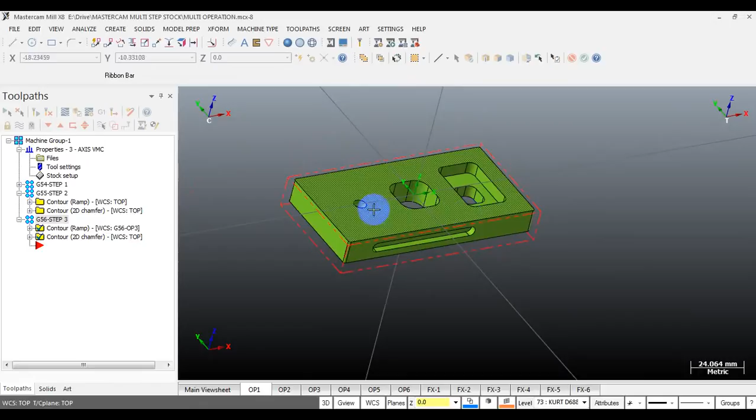Okay, at first let's take a look at our part. Here I got a very simple part, and this part needs three setups to finish. You can see here in the first step we machine this face, and in the second step do a facing to cut to the desired thickness and do some chamfering here. And in the third step or third setup, we need to cut a slot here and do the chamfer. So this is our part.

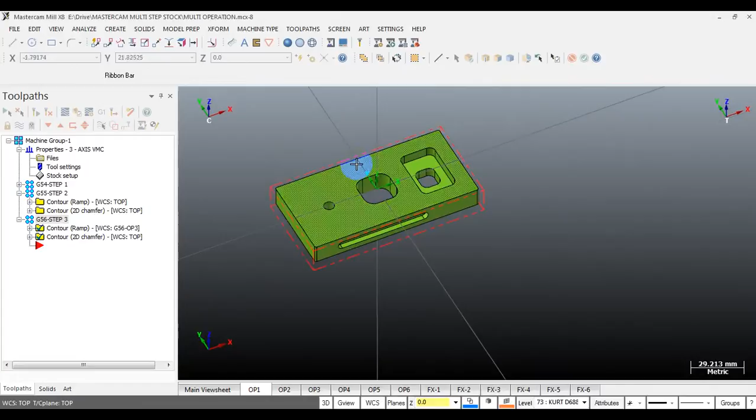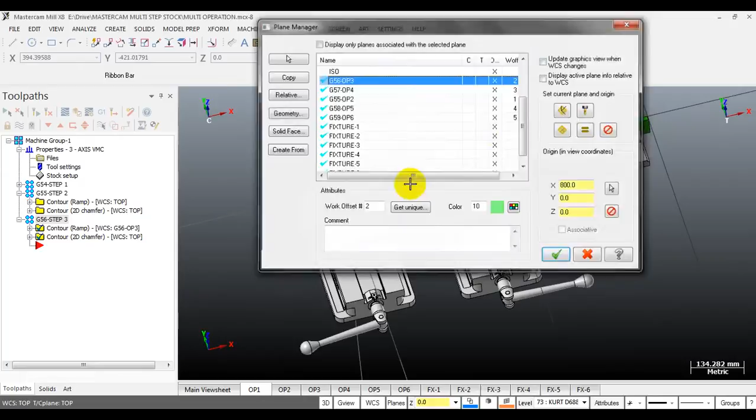And I will show you the setup. Okay, I have made three coordinate systems. You can see here. You can see this is our, sorry, coordinate system. Let's see. I got three vices. This vice for step one, this is for step two, and this vice is for step three. This is just for information only.

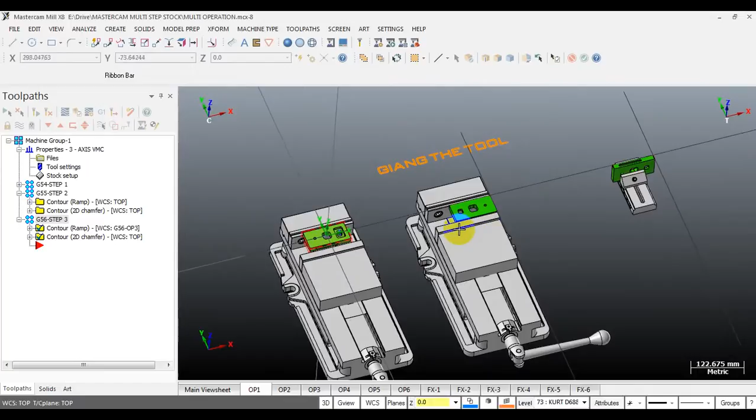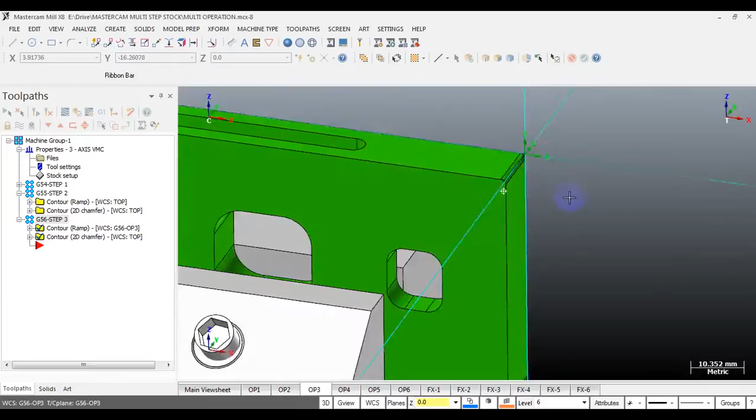You can see I have one, two, and three. I have created three coordinate systems for every step, and I got here one, two, and three toolpaths for step one, step two, and step three. To save your time, I have created them before.

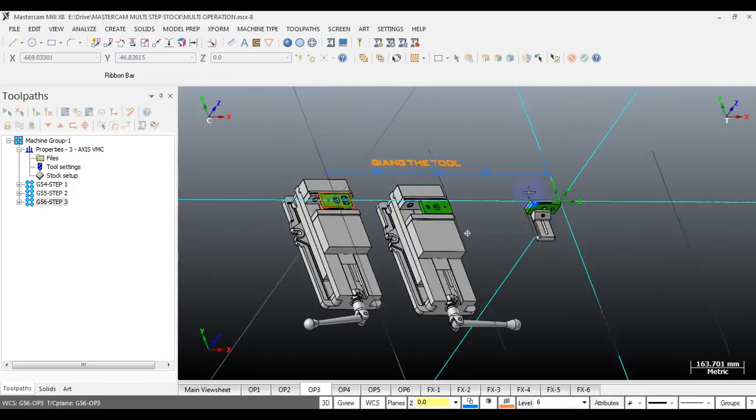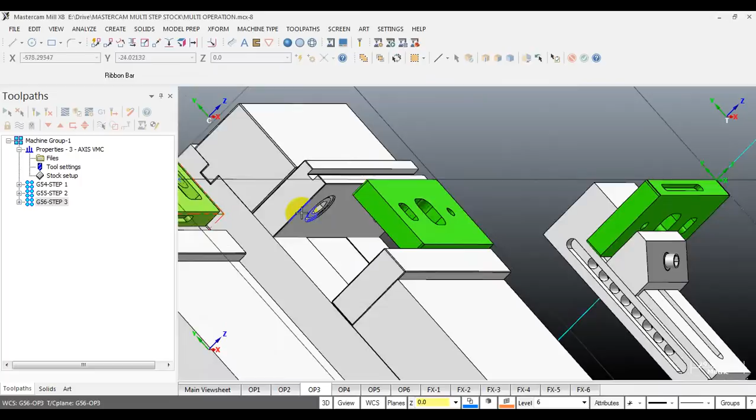So this is our part in step one, and this part is step two. We need to clamp and do the facing here, facing this surface. And in step three, we clamp like this and mill this slot. Okay.

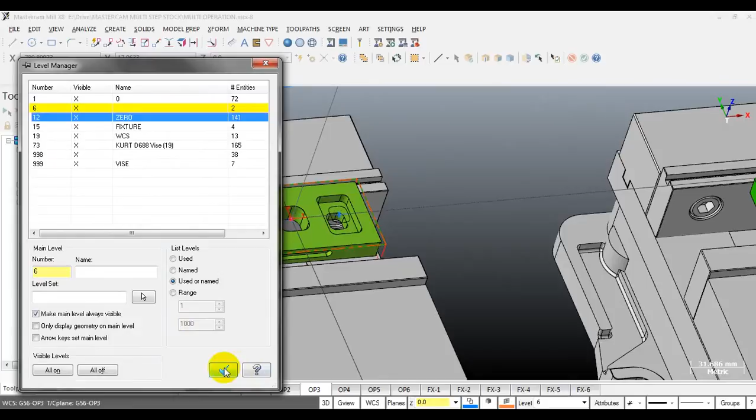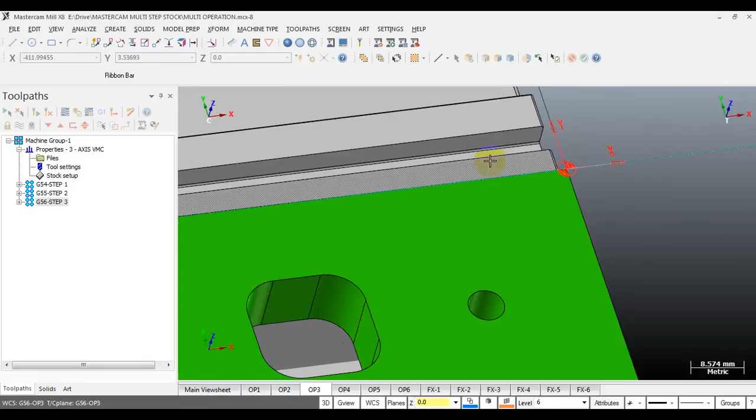I will turn on the layer so you can see in this red area is the coordinate system, the first coordinate system. And here on the edge is the coordinate origin of step two, and here I got the origin of step 3.

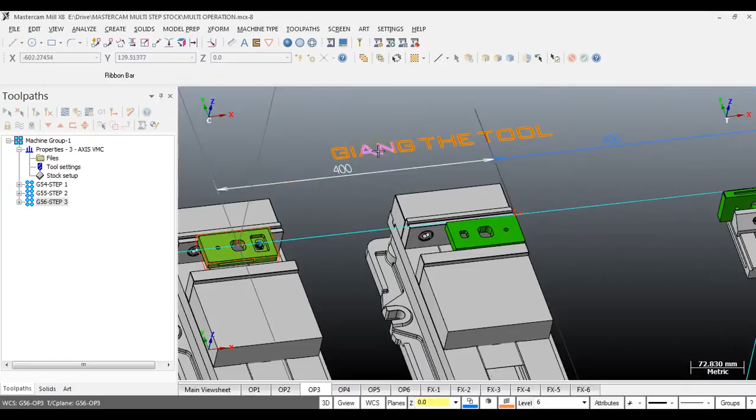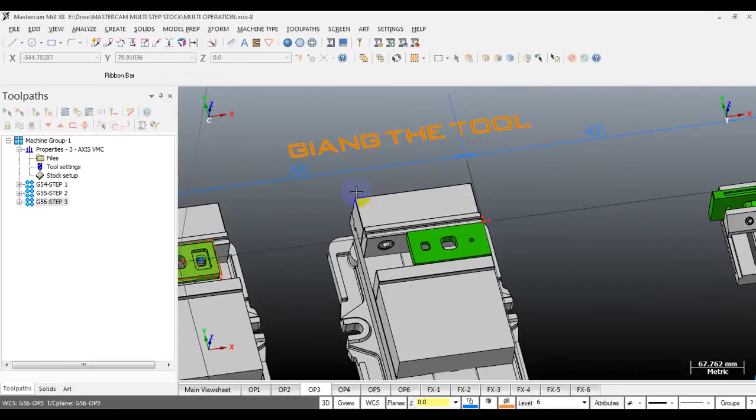And one thing very important, in Mastercam you have to know the distance between this origin to this origin, and from this origin to this origin. And in this case I made this 400 millimeter. You can see here the distance is 400 millimeter. Yes, that is very important. If you don't know the distance, it will be very difficult or impossible. All right.

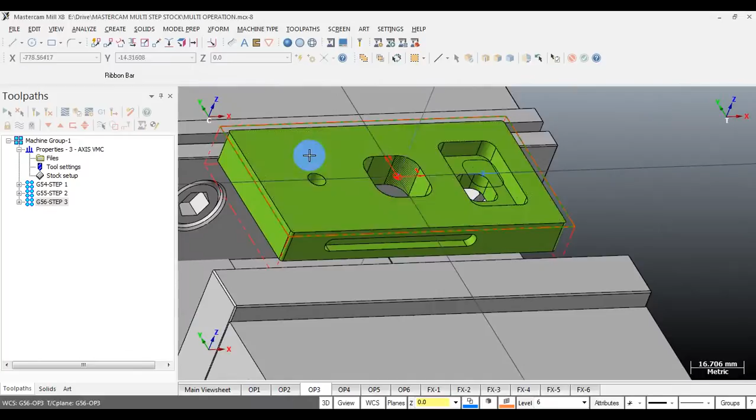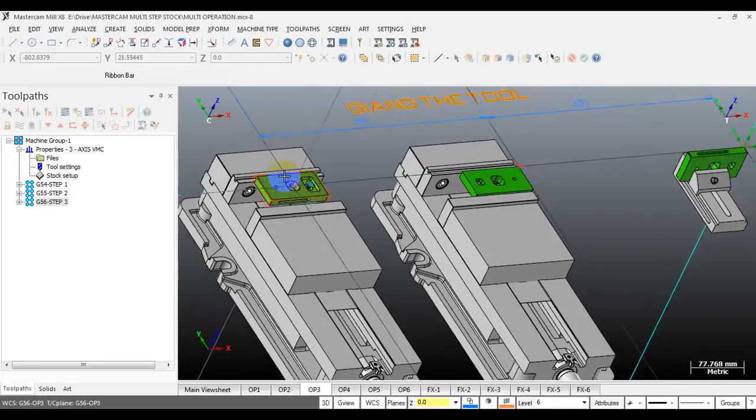Why do we need to verify stock like this? Because if you machine using only one solid, and you create coordinate systems on this solid, you cannot verify the fixture, and it's very difficult to know if there's a collision. So this is a very good way to control the process.

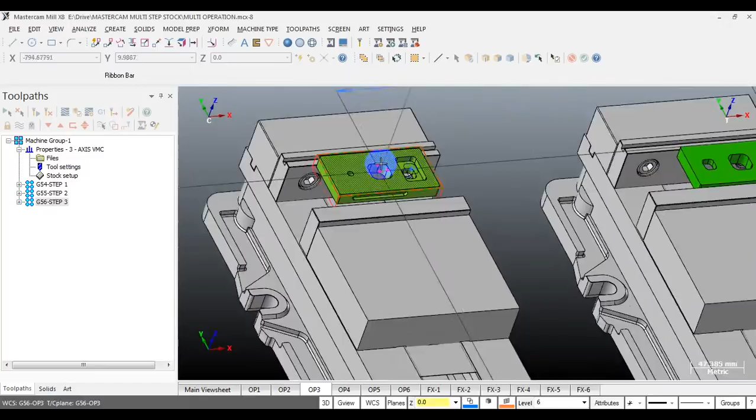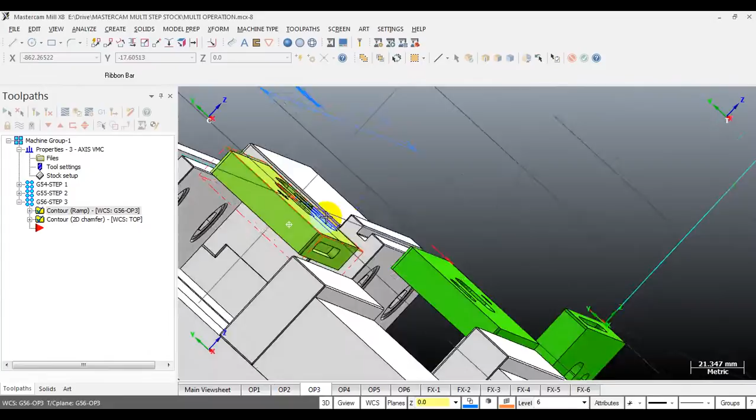Okay, you can see here again, step 1 for this vice, step 2 for this vice, and step 3 for this vice. Okay, we begin with step 1. I do a stock setup here, already got the dimension, and in this case I use 16 millimeter thickness stock. You can see here the initial stock, and I have created the toolpath already, so we can verify the first step here.

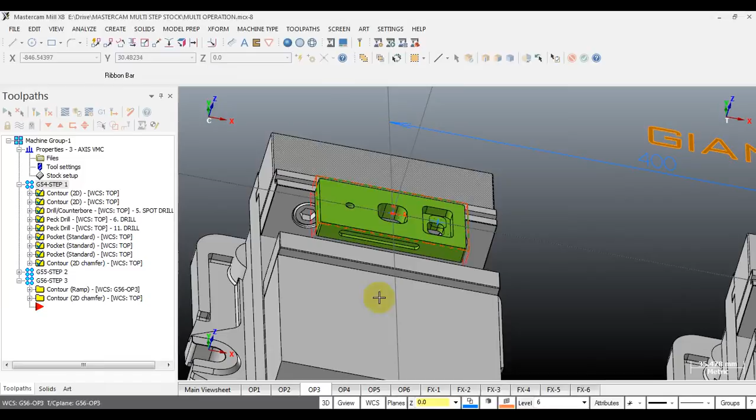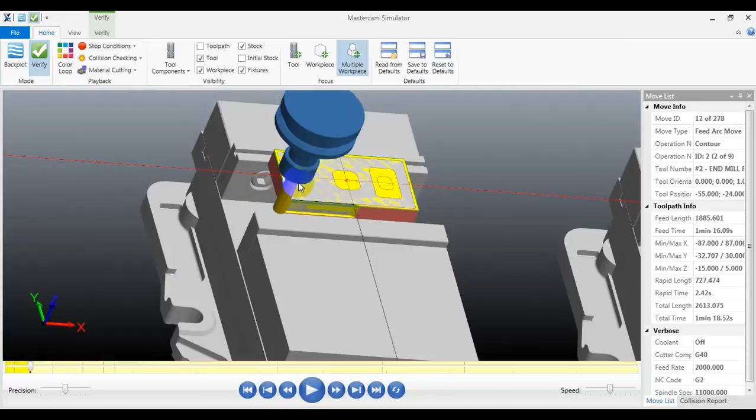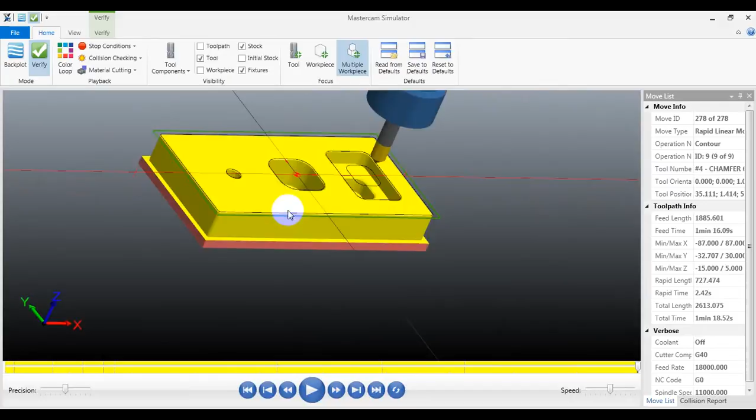Okay, let's begin with verifying the first step. Sorry, my computer is quite slow. Yeah, you can see here we have 3 vices. At first we verify the first step. Let's do a quick view so you can see that. So I will do a fast forward. Okay, and this is our first step. Let's turn on the workpiece so you can see it clearly. And this is the part after the first step. You can see that.

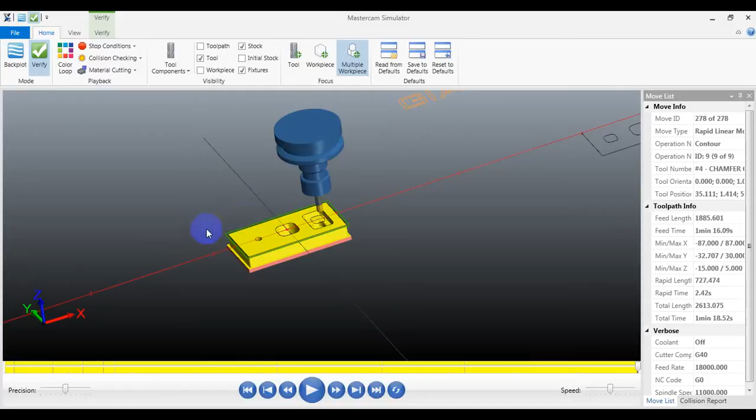Okay, and the important thing is we have to save this stock, and then we use the saved stock in step 2. Okay, let's save the stock. You click on File, Save Stock As, and select the location. Okay, you can name it, because this stock is used for step 2, I name it step 2 stock. And click save. You can see that the stock will be saved as STL files. Click save. Okay.

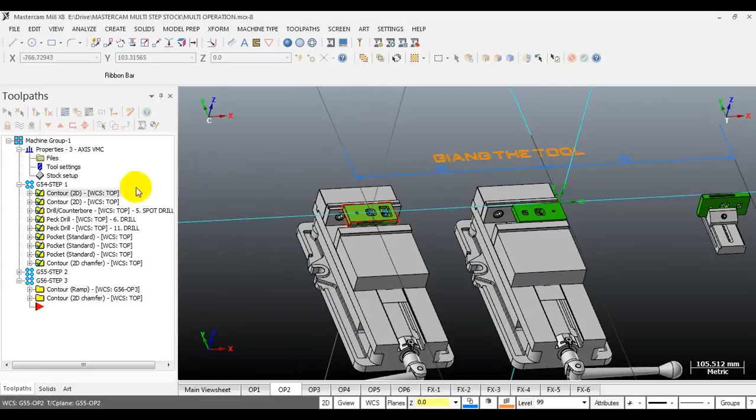After you have saved the stock for step 2, the next step we need to do is import that stock into our environment. To do that, you select File, Merge Pattern, and select the STL file you have saved. So you can see this is our STL file.

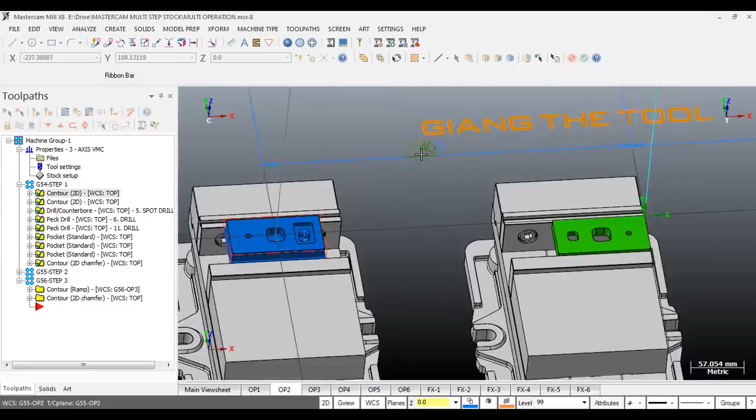So this is the location in step 1, and we need to move it to the right location, the right position in step 2. Because the stock is in STL format, you cannot do much with it. Just calculate the distance and move and rotate to the right location. So before you move, as I told you before, you need to know the distance between our two coordinate systems. In this case, it's 400 millimeter. Okay, it will help you when you move.

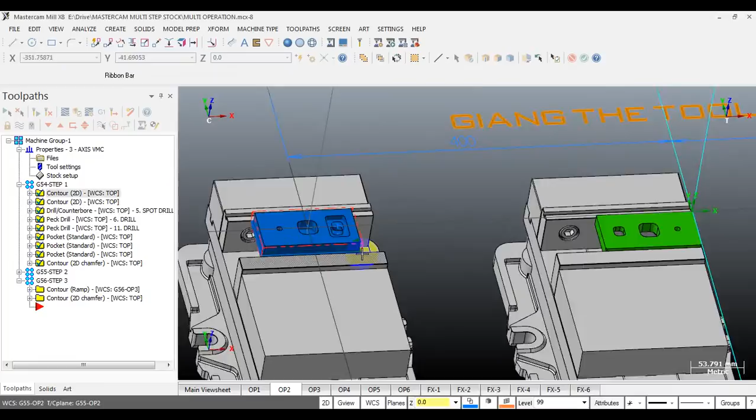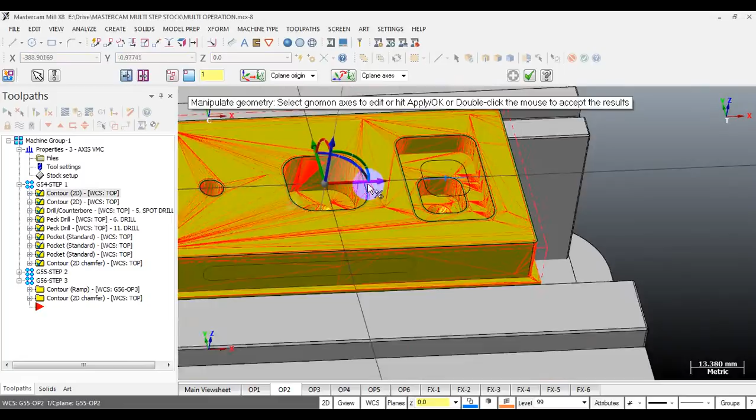So we select the STL file, and I move it in by using Dynamic Xform. So you can select a reference point, this here, the origin of step 1. I usually do this. And the first step, you need to flip it. That means you have to rotate it 180 degrees.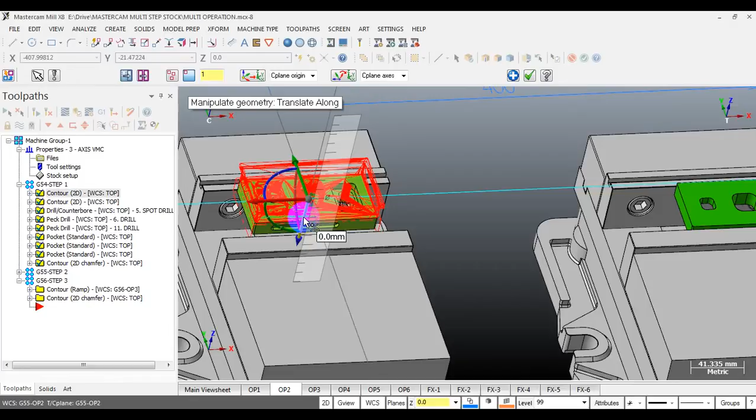Okay. After you flip it, you move it in the Z direction about equal to the thickness of the part, because in step 2 the origin is set on the face. So this part is 12 millimeter thickness, so I move 12, and okay.

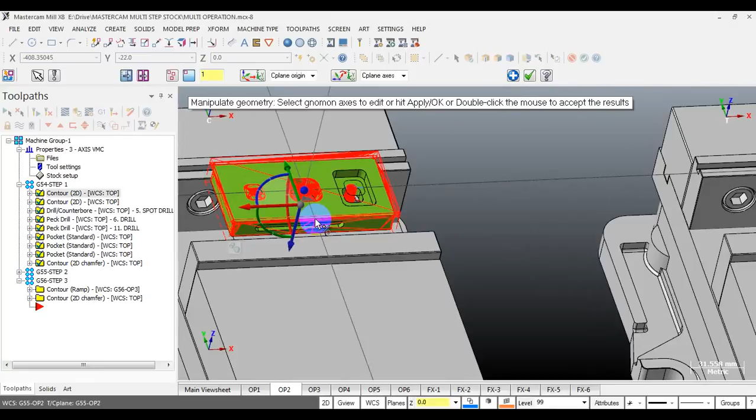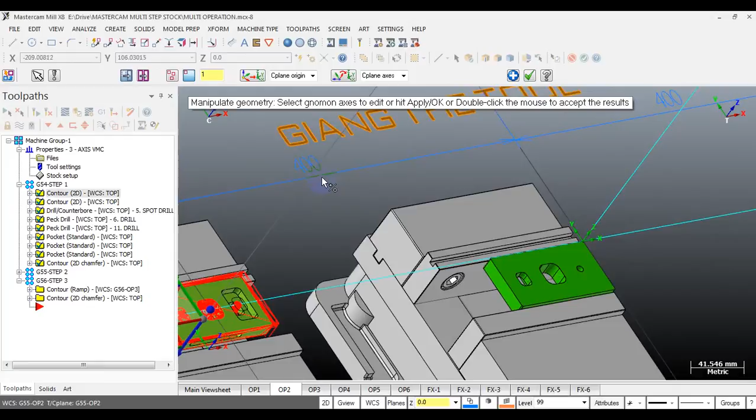Next we need to move it in the X and Y direction. For the X we need to move a distance equal to the distance between the two operations here. That's 400 millimeter. And because in this step the origin is set at the center, and in step 2 the origin moves to the edge of the part, we need to subtract the distance between the center and the edge.

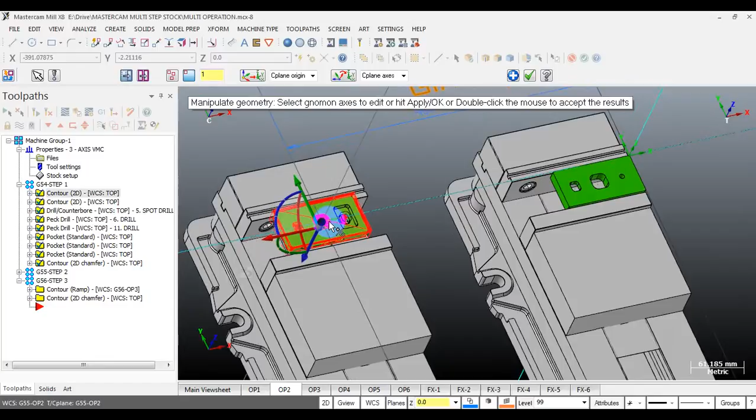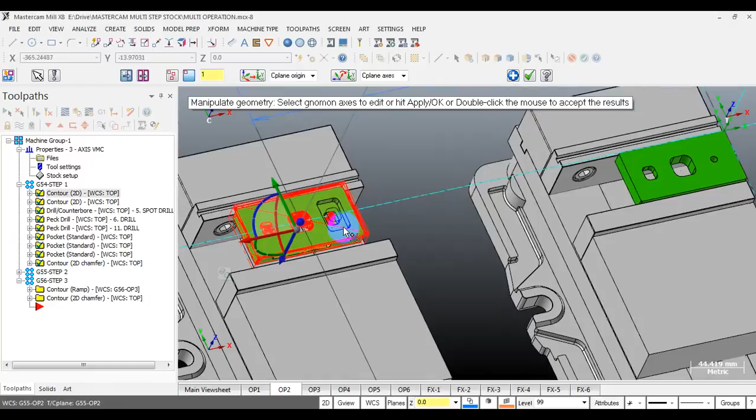So the total distance we have to move is equal to 400 subtract 50. Why 50? Because my part is 100 millimeter long, so I move it 350 millimeter. That's the right value. Sorry, I moved it in the wrong direction. You have to input minus 350.

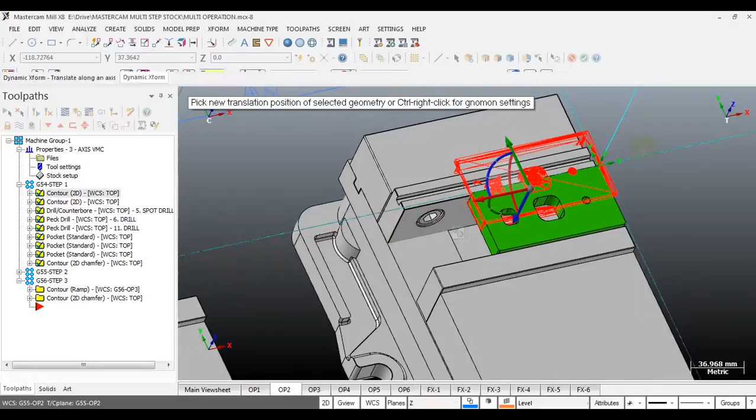Okay, our part is in the right position in X direction, and the final direction is the Y direction. In the same manner we have to move a distance equal to the distance between the part center and the edge of the part. My part is 50 millimeter wide, so I have to move a distance of 25 millimeter. Sorry, minus 25 for the right direction.

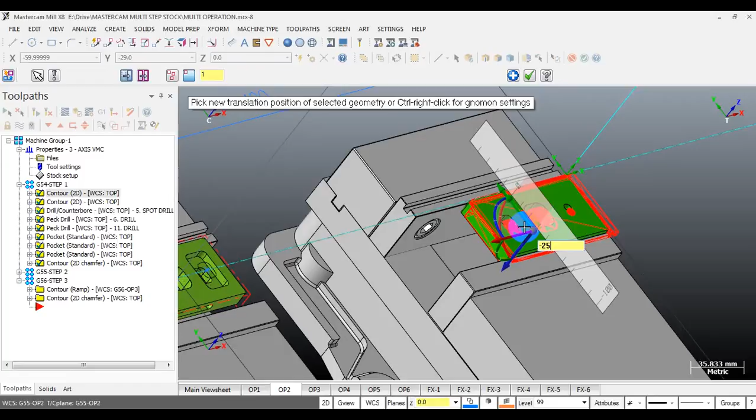Okay, done. And so you can see the stock is now in the right position. In step 2, that's what we need to do: move the stock to the right position. That's very important. You have to calculate the value before you move.

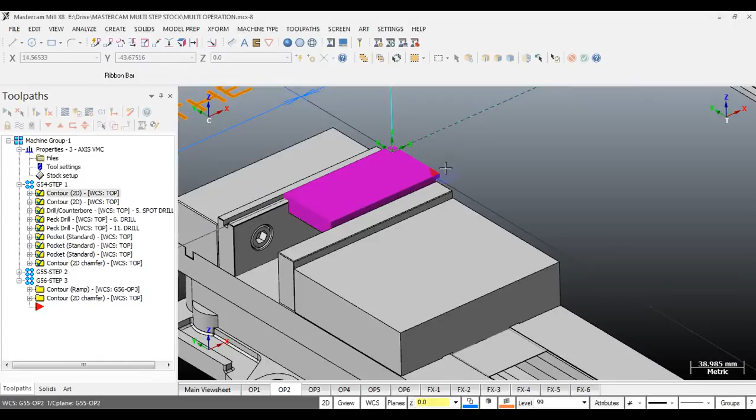Okay, the next step, very important. You have to save this stock in the right position into another STL file, and we use that file to verify step 2. Before you save this STL file, you have to turn all the layers off. Just keep this stock. Why?

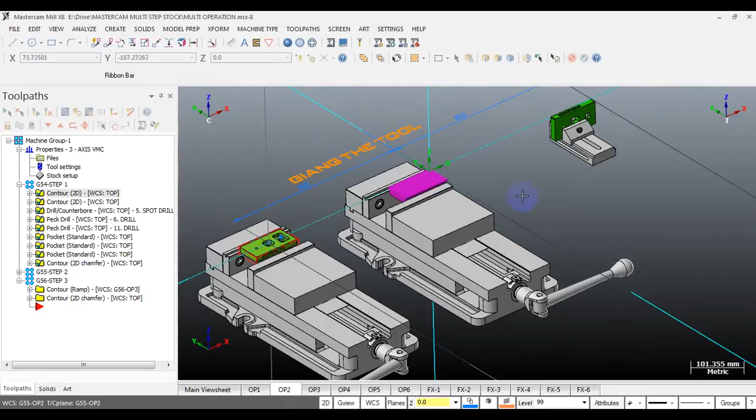Because if you don't turn all the layers off, such as this device, when you save, all of the solids here will be saved to the STL file, and we don't need it. It's not good. So first I moved it to another layer, another level. Okay, it is level 99. Okay, only one entity, that's the stock.

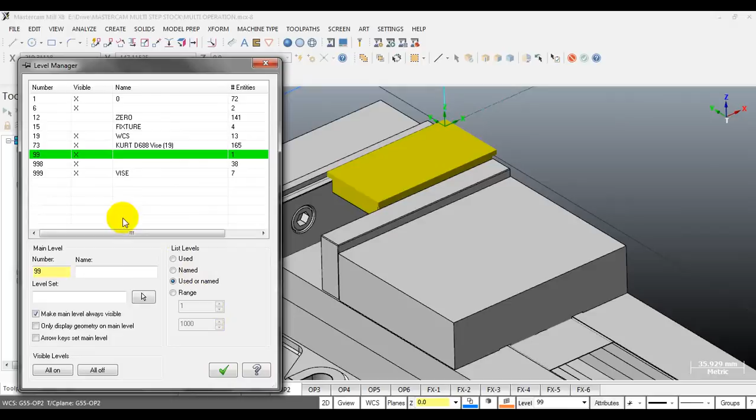You can move it to another layer, another level, and you turn all the layers off. Just keep the stock. I repeat, we need to keep the stock only. So now we can save it. Save it. You can save it in another STL file.

You can overwrite the old file you saved before, but it's better you save it in another name, such as step 2 stock right position. I think you should keep the original file because if we have to make some change, you can use this file to make changes, and you save this stock in the right position in another name, and this is what we use to verify in step 2.

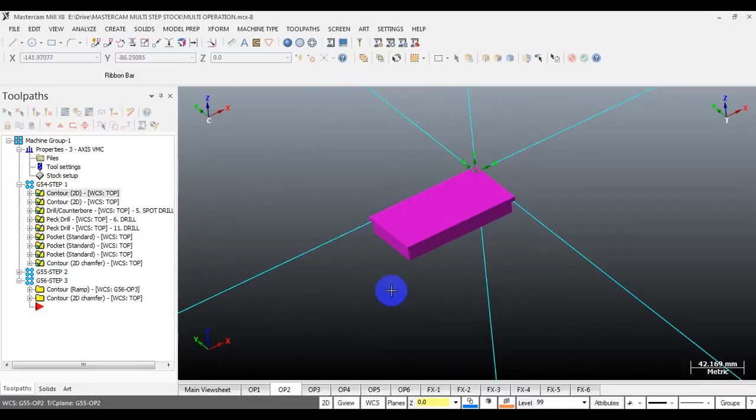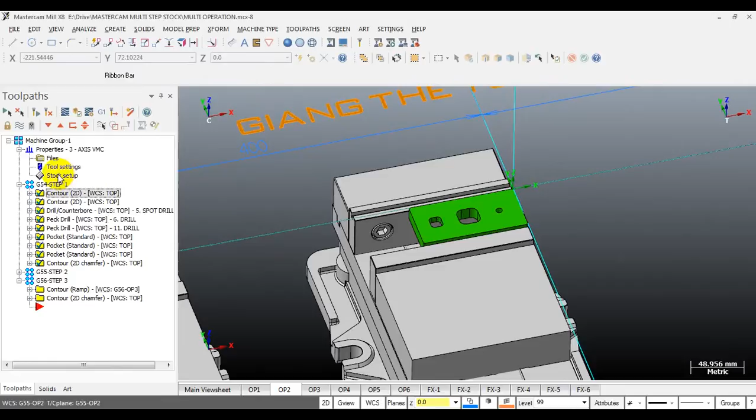Okay, it's done. The stock has been saved, and we can delete this now and turn the layers on. Okay, after we save it, we have to select that file for our simulation. Now move to step 2.

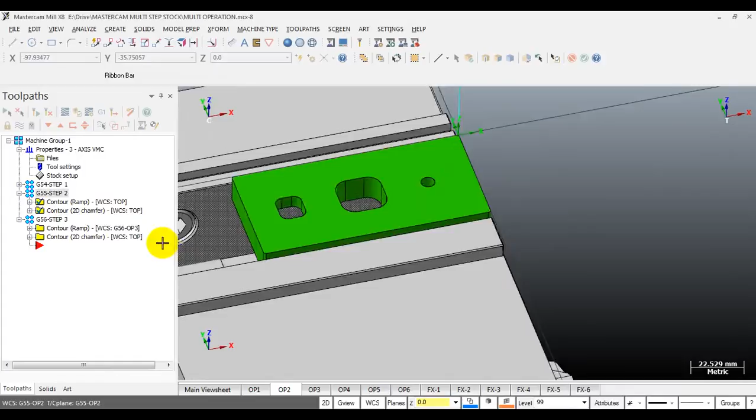In step 2 we have to do facing to cut the remaining material and do some chamfer here, very simple. You move to step 2 and again move to stock setup. Now we need to select file, since in Mastercam we use the STL file for stock setup. You can browse file here and select. Remember, you have to select your stock when it has moved to the right location. If you don't select it, this file will not work.

Okay, you can select the step 2 stock right position file. You can select display to preview it. Remember, the stock plane you need to keep as top because you have moved the stock from step 1 to step 2. In this case top is the plane I use for step 1, so you should keep this value, not change it to any other plane, just keep it.

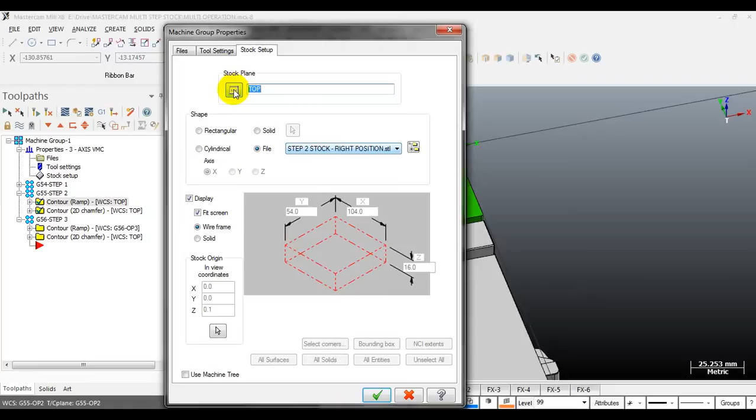So click OK, and you can see that this is our stock in step 2. That's what I want to talk about. Now we have the stock in the right location, so we can verify it.

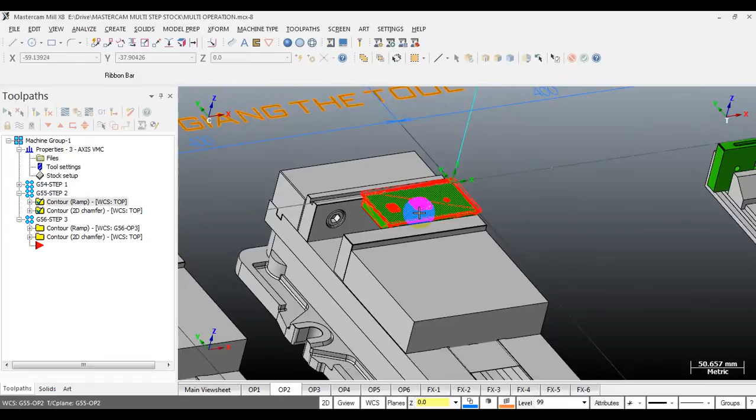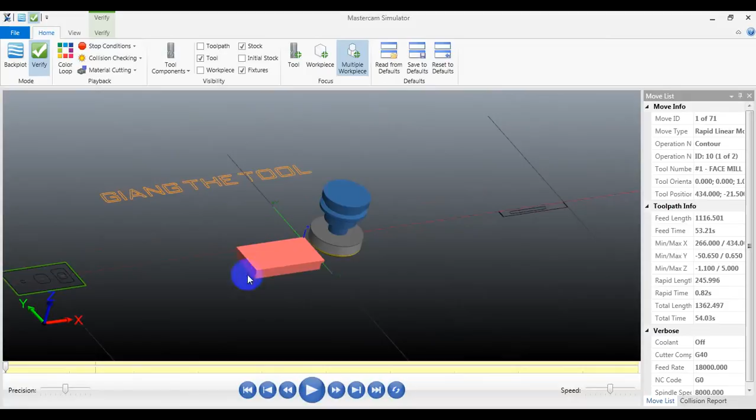Next we can verify step 2 with the right stock. Okay, select step 2 and verify it. So you can see here we got the stock, the right stock, and the fixture. That's what we need to talk about. That's what we want, right?

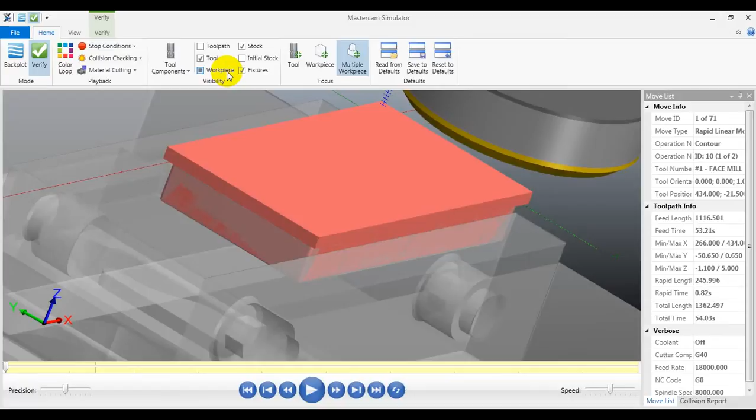You can select the workpiece and display stock only, and just do the verify. Okay, there is the facing. After the facing, we have this part you can see, and the chamfer. Very simple. Okay, so step 2 is done. We got the stock, the right stock has been verified, so we can control all of the cut.

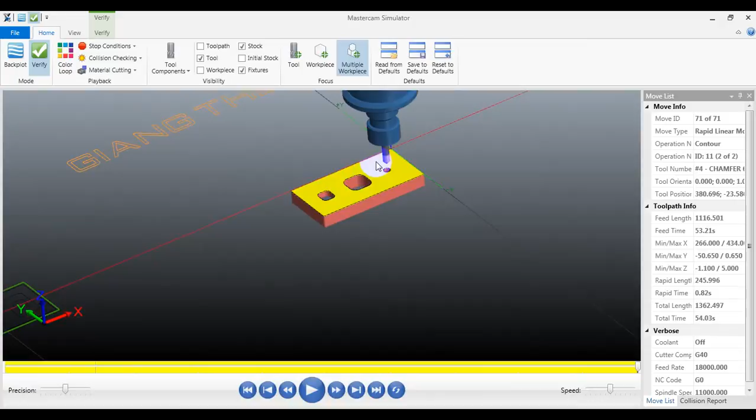Okay, and we do the same as step 1. We save this stock to use in step 3. I will do it quick, so to save your time, another save stock, and rename this step 3 stock. Okay,

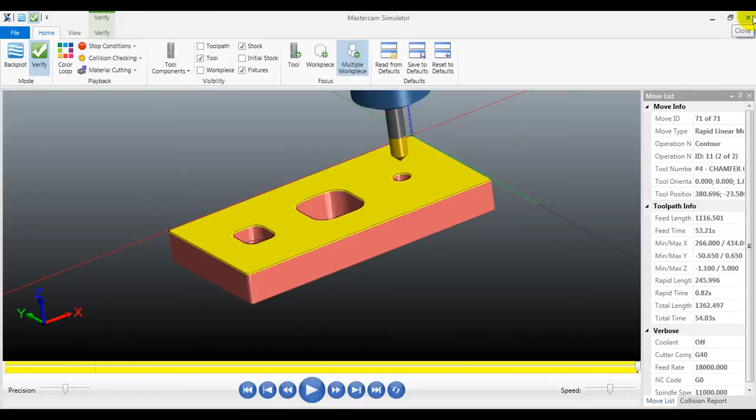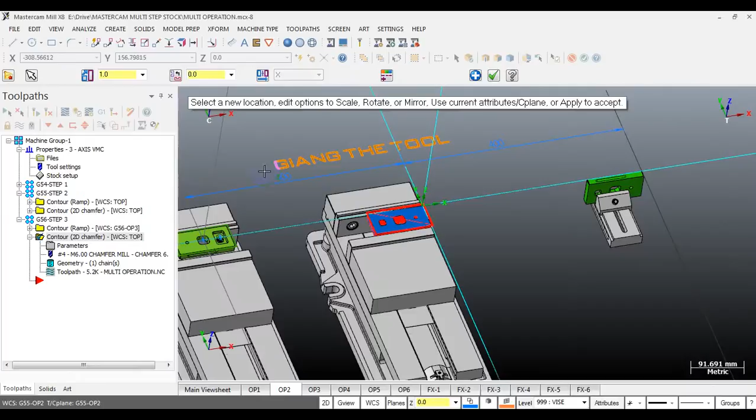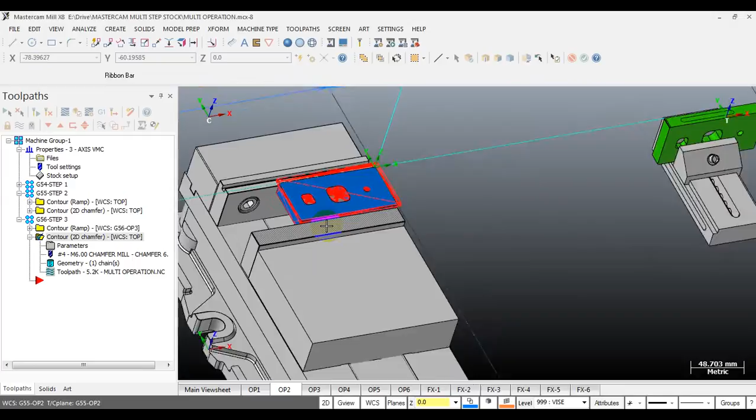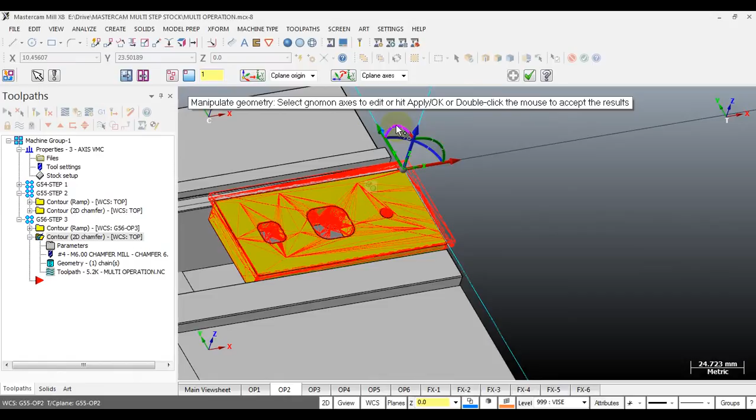I have turned some layers off for easy work. Okay, now I can move it to the right location. Select the stock, dynamic, Xform, select the origin for reference point. First, I rotate it by an angle of 90 degrees, and then I rotate it 180.

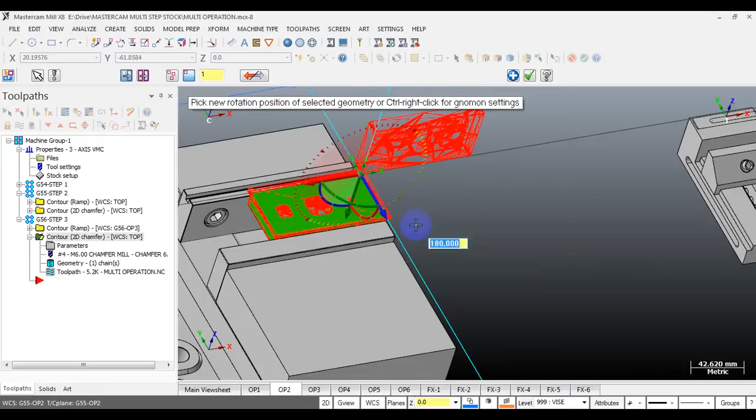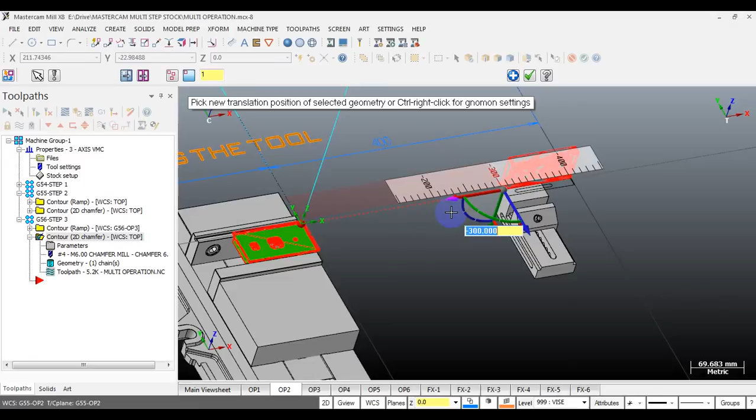As I know this distance is equal to 400, so I can calculate the right value of distance I need to move. So I need to move here because our part length is 100 millimeter, so I move minus 300. Okay, now the x direction is right. I have to move in z direction because the width of the part is 50, so I move 50.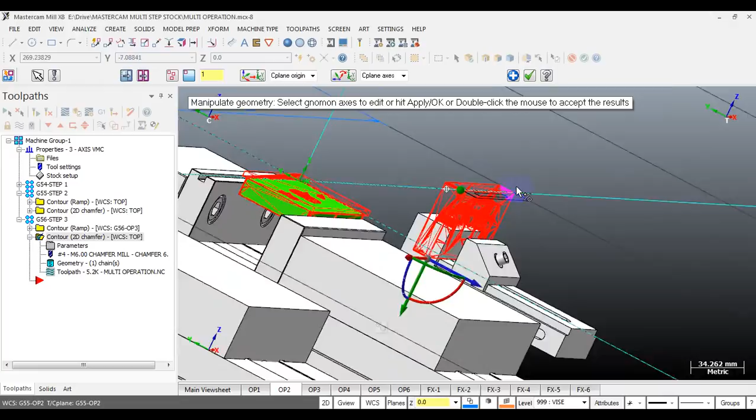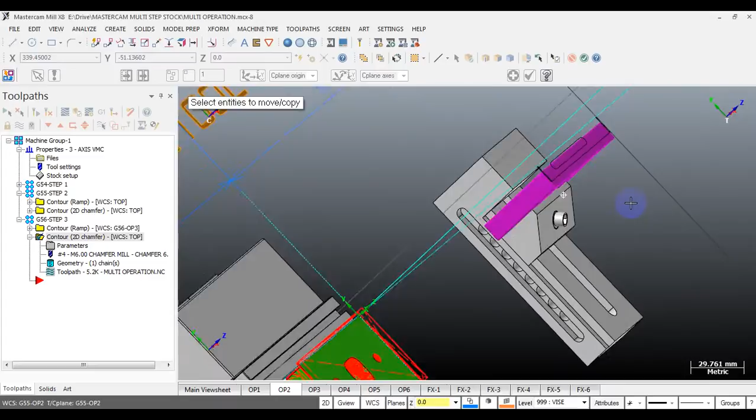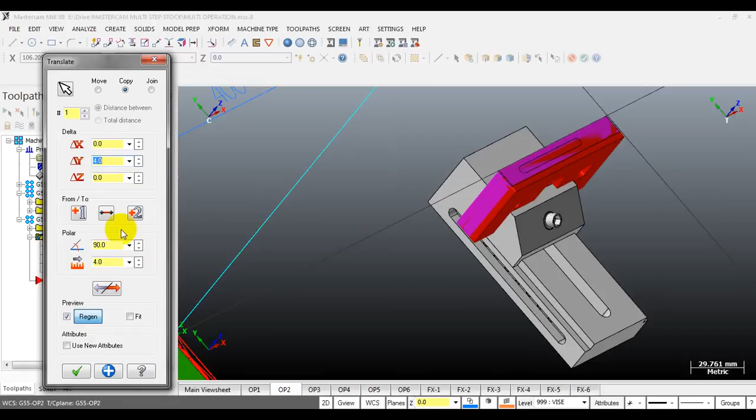That seems right? Okay, the last direction is the y because the part thickness is 16 millimeter, so I move 16. Okay, I'm sorry, the thickness is 12, not 16, so I move back 4 millimeter. Okay, sorry, I move it 4. Move. Okay, the part is now in the right position.

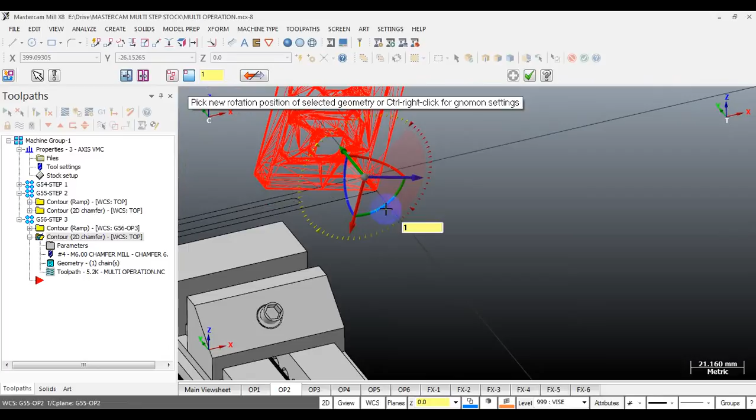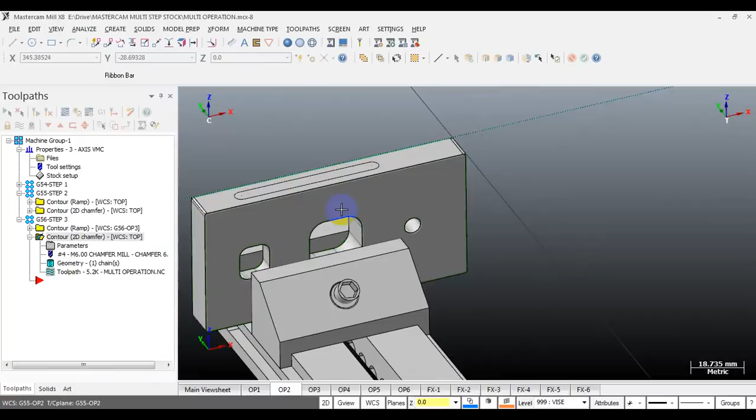Let's check it by displaying the part. Oh, I'm sorry, this is not in the right location. We have to rotate it 180 to turn the part over, and this toe needs to be on this side. So again, I move it. Let's do it quick. Okay, I'm sorry. 180. Okay, 80. And this direction, yeah, 100. Okay, let's check it now. That's right now. Okay, I'm sorry.

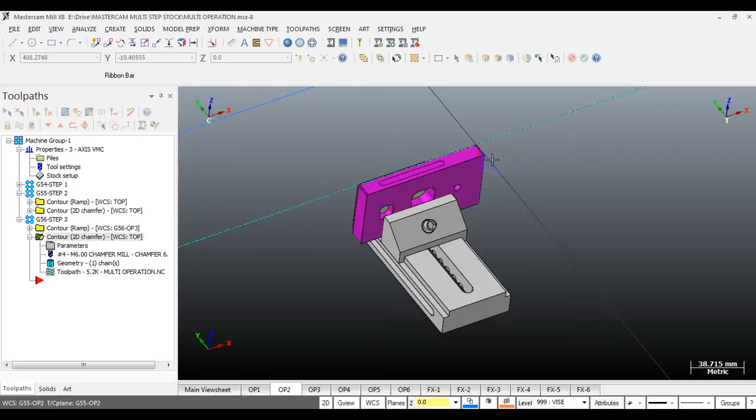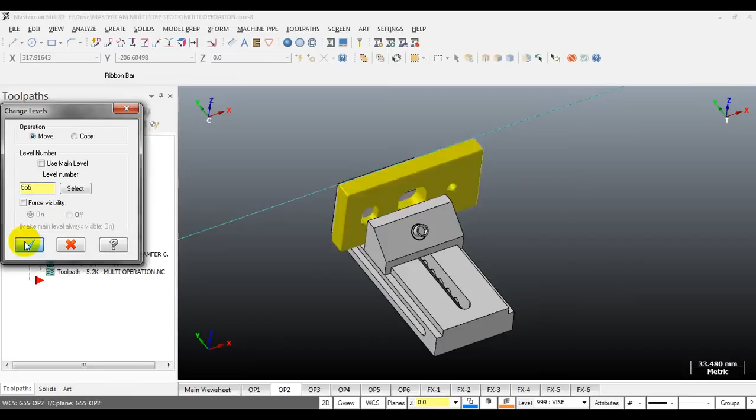So we got the stock in the right position, and we need to save that stock in order to use it. Before you save, remember to turn the levels off. We just keep the stock only, so you can turn the levels off and you keep the stock. Sorry, first I need to put this stock into a unique level. Select it and change to level 555 for example. So now I can keep.

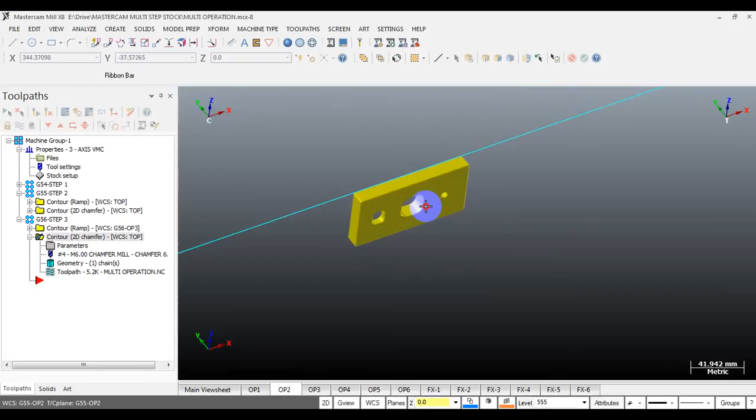Okay, I keep this stock only, and now we save this stock to use. Save it, select STL format, Parasolid, stereo. Okay, stereolithography, and select another name. Step 3 stock right position. Okay, let's go. After we save it, we can delete it and turn on the layers. Okay.

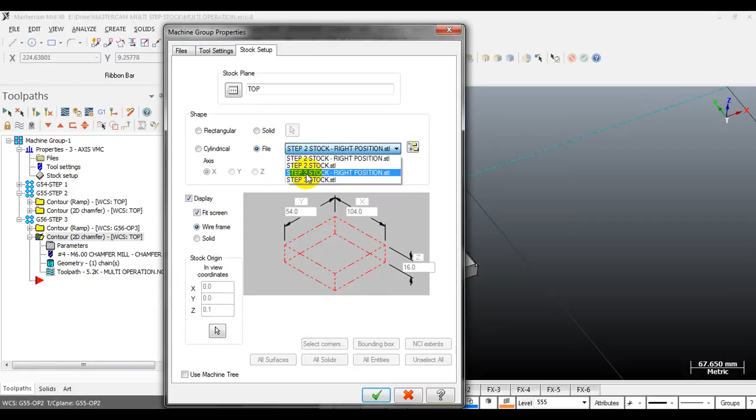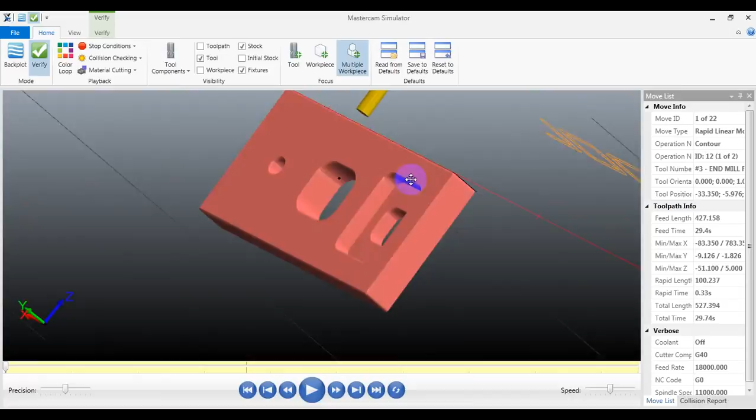After we save it, now move to the stock setup and select this file. Okay, we select the file, you can see it appears here. Step 3 stock right position. Just select it. Click OK. So you can see this is the stock for step 3. The last thing is we can verify step 3 with our stock. So you can see this stock is taken from step 1, step 2, and now it's moved to step 3 for our simulation. Now let's do it.

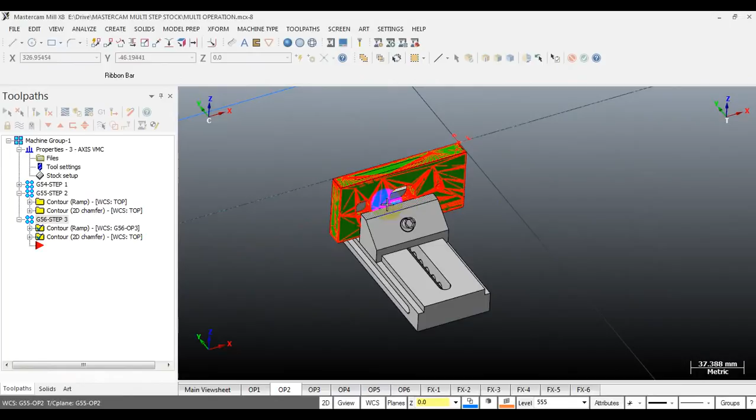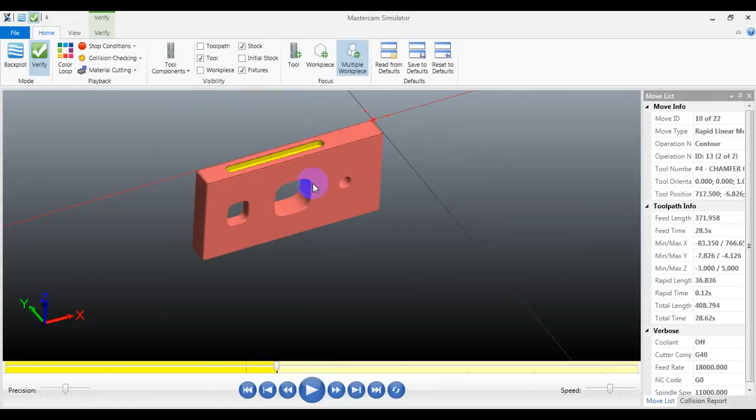Just cut in the chamfer. Oh, sorry, some collision here. Maybe wrong chain direction. I need to change it. Sorry. Okay, let's do it again. So this is the right operation. Yes, this is our finished part after the full simulation, and the stock has been verified from start to finish.